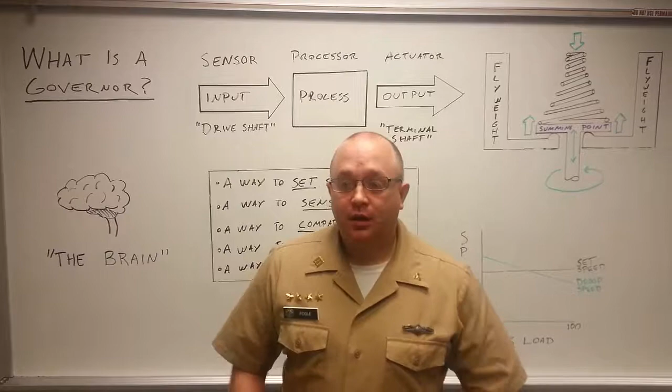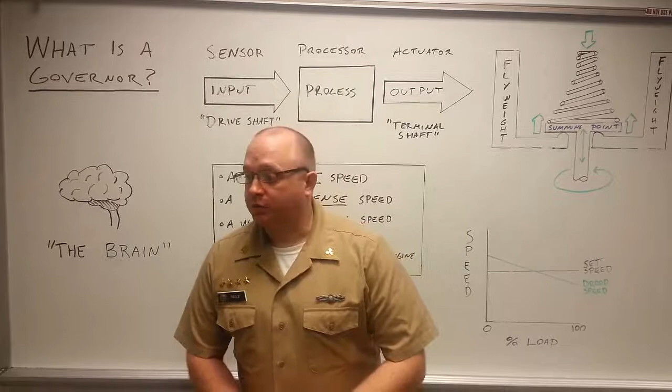Before we get into the design of our test stand, I would like to briefly go over governors and governor operations so that we have a firm foundation to work from. First obvious question is, what is a governor? A governor is a device, mechanical or electrical, that regulates and controls the speed of an engine.

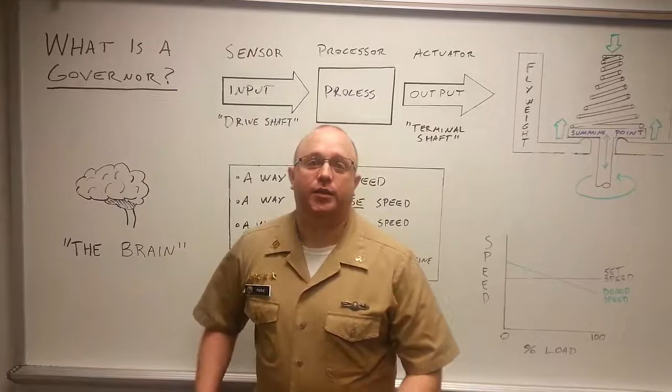You can think of it, and it is also often referred to as the brain of an engine. So governors operate, you can think of it as a simple input, process, output device.

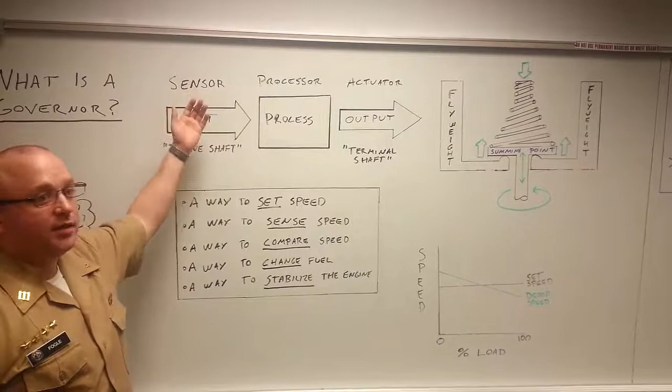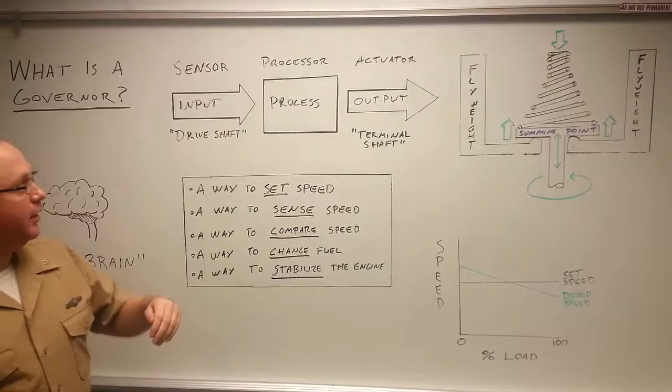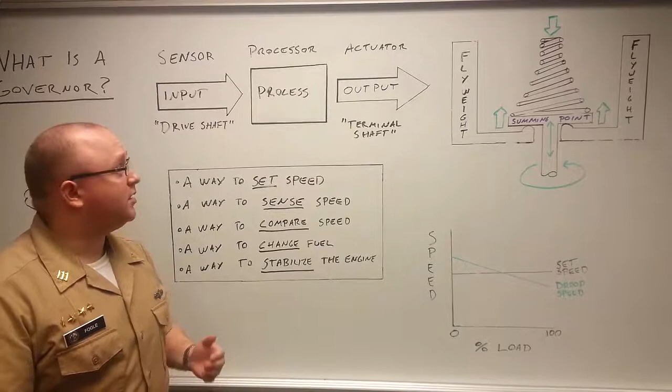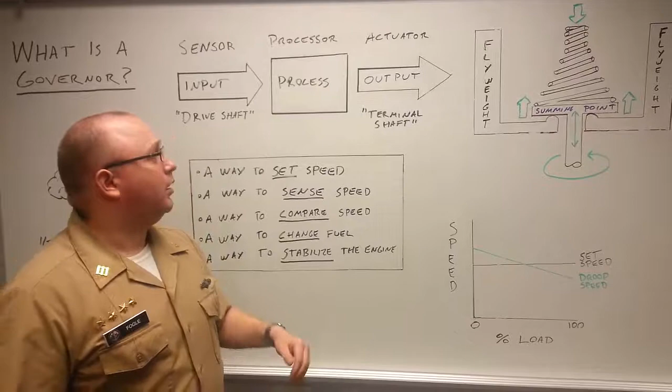Where as our input, we have our sensing element, which is going to directly sense the speed of the engine, usually through a connection through a drive shaft. Then that signal is taken to a processor, which is going to take that signal, compare it to a prior set point, and determine an outcome, which will be delivered through an output, which is an actuator that is controlling some device to physically alter the speed of an engine. Usually it's a terminal shaft driving a fuel rack to change the amount of fuel delivered to the engine.

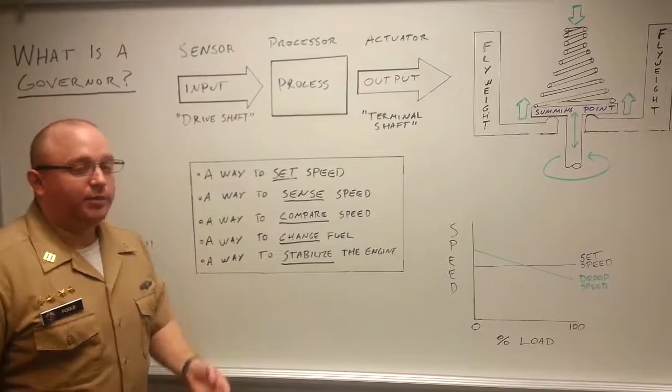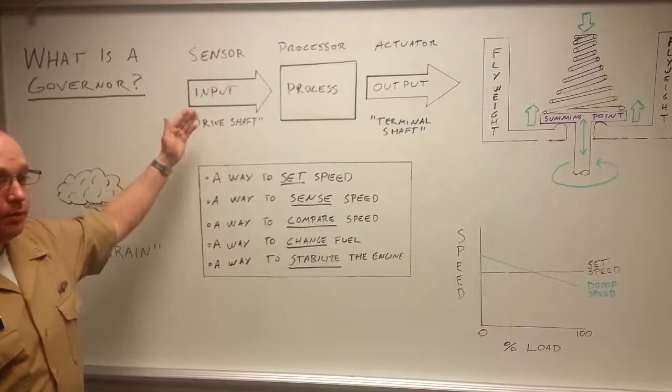So with this, a governor needs to be able to do 5 things. It needs a way to set the speed so we can determine exactly how fast or how slow we want our engine to be running. A way to sense speed, as we said, with our input process, where we get that signal in.

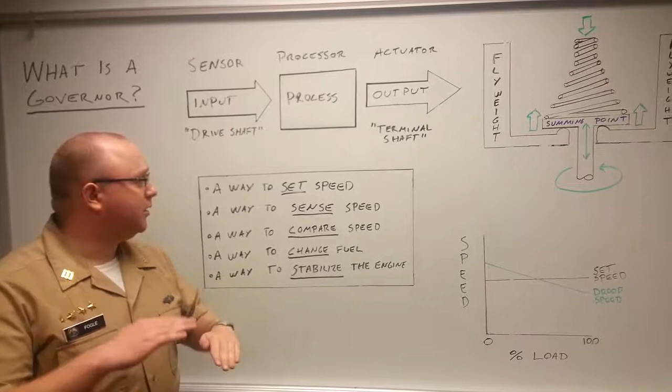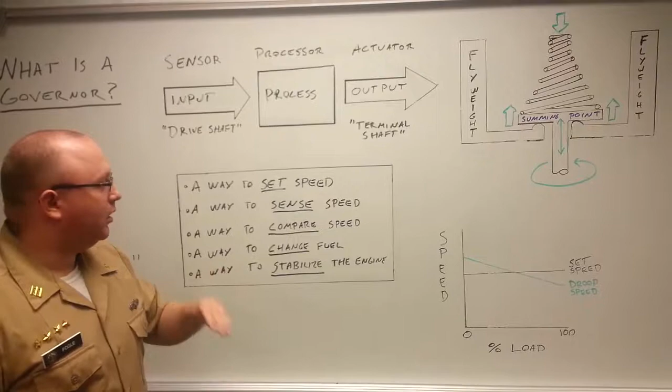Then we need to compare that sensed speed to the set speed to determine if there's a difference. If there is a difference, then the governor is going to act on that differential, and it's going to change the amount of fuel delivered to the engine so that to correct for that change. And finally, it needs a way to stabilize the engine to prevent the engine from constantly correcting itself and getting excessive hunting or surging.

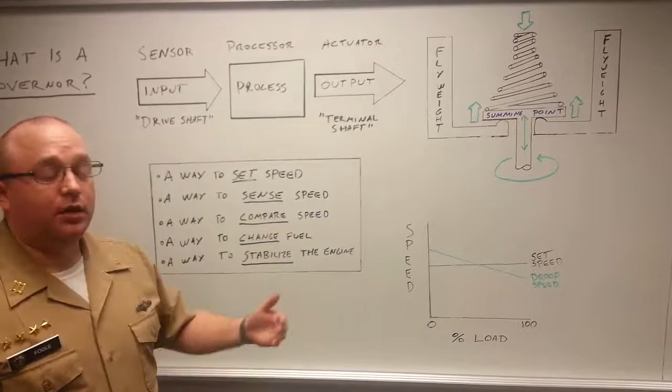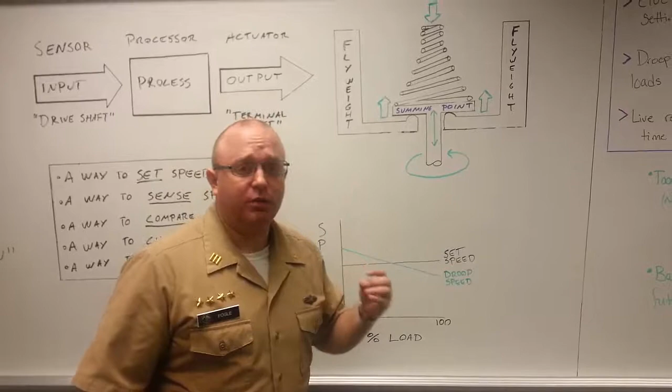So as a basic overview, there's both electrical and mechanical governors, but I'm going to focus on a simple type of mechanical governor, which is known as the flyweight method. In this method, we have our drive shaft connected to a system with flyweights and a spring.

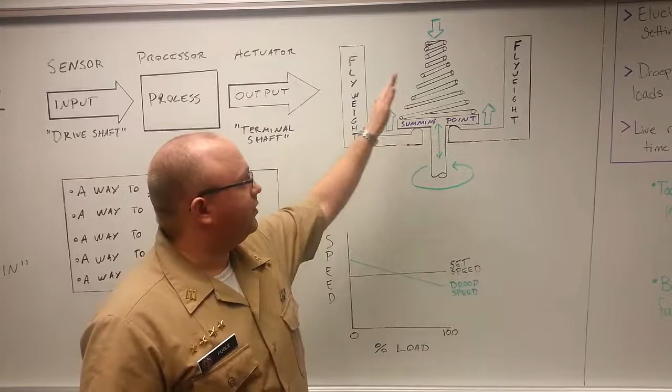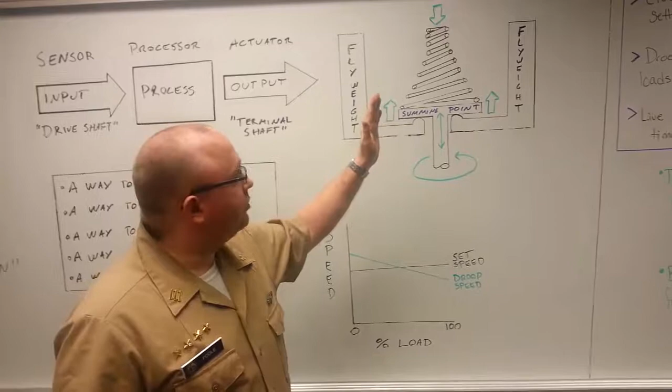As the drive shaft spins, the flyweights swing out and push the summing point up. As the drive shaft goes slower, flyweights come in, summing point goes down due to the spring pressure, and this is controlling a pilot valve that's going to control our terminal shaft actuator position, which controls our fuel.

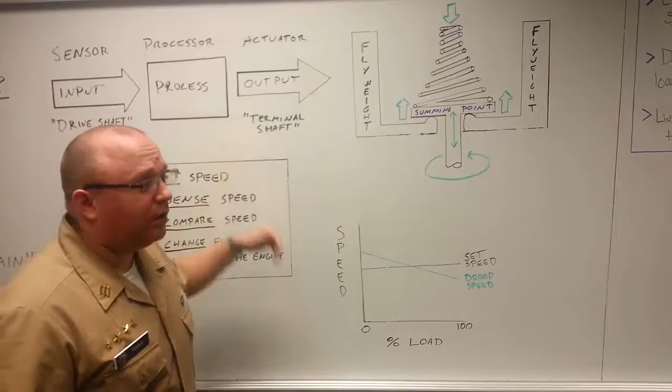Another final important aspect of governors is the concept of speed droop. In this case, speed droop is a percent of change from our set speed that's going to occur as we move from no load to full load. Most governors have an ability to adjust how much droop you have,

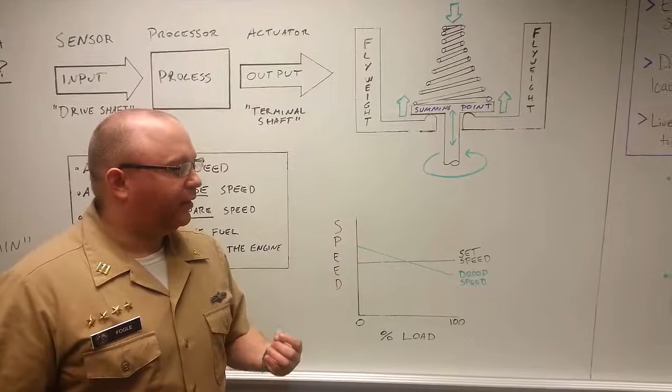but it's important to have this setting properly calibrated. If it's too much droop, the engine is non-responsive. If there's too little, then the engine will have excessive hunting or surging.

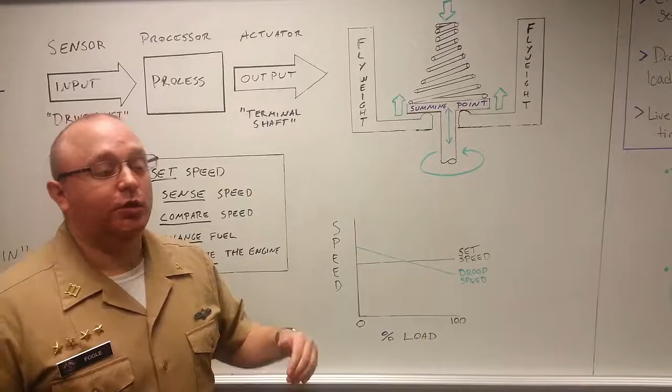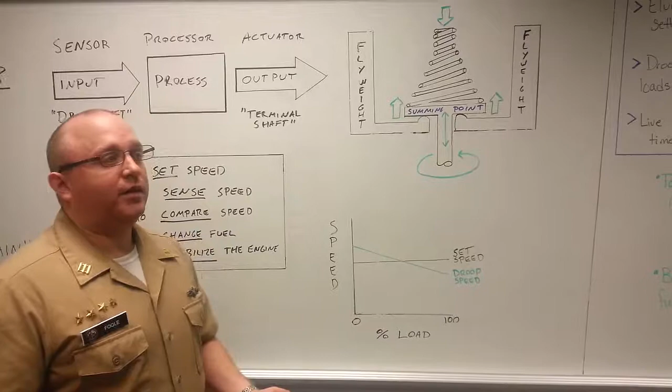So with all these pieces and components, problems can arise with the governors, and that is where we decided to create our governor test stand in order to address and demonstrate some of these issues.

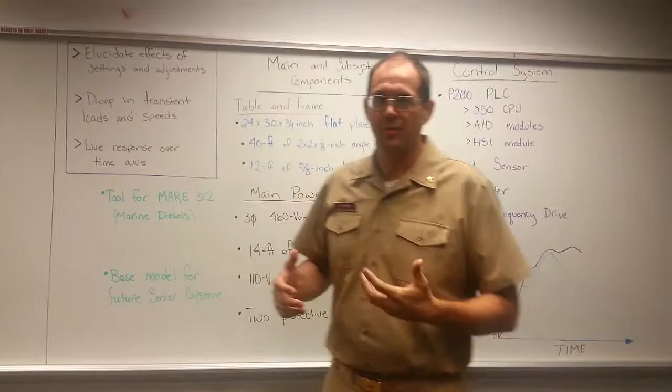As Alex mentioned, there's some aspects that we need to address and demonstrate through the test stand that we fabricated, and mainly I want to cover the highlights of what that test stand does and how it does it. So really, first thing it does, it elucidates the effects of settings and adjustments.

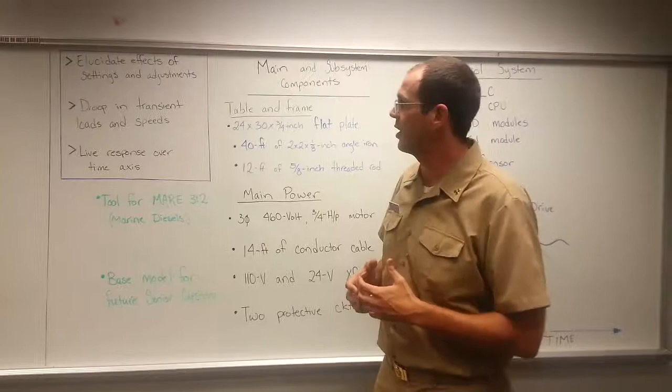On the UG governor itself, which is what we test, it has control knobs on it, and setting those, we wanted to visually demonstrate through a live graph what happens to the governor. It also demonstrates, as Alex mentioned, droop in transient loads and speeds, and it delivers a live response over time axis from 2 inputs, as you'll see later.

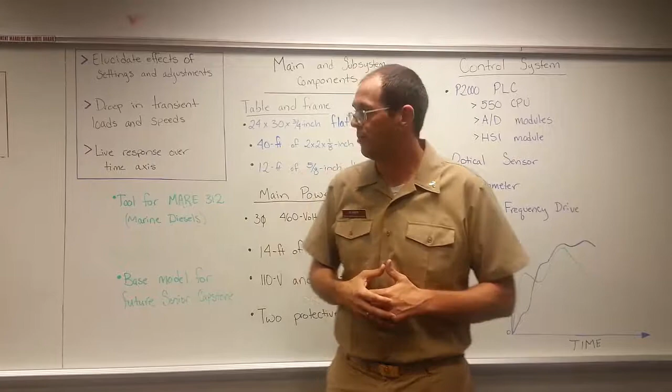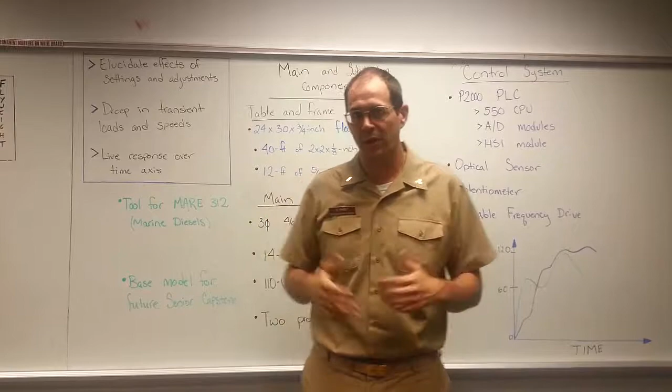We developed a test stand to address two key points for TAMU: one, as a tool for the MARE 312 Marine Diesels course to help illustrate what a governor is and how it works, and as a base model for future senior design capstones so they can expand and include actuators and PGAs.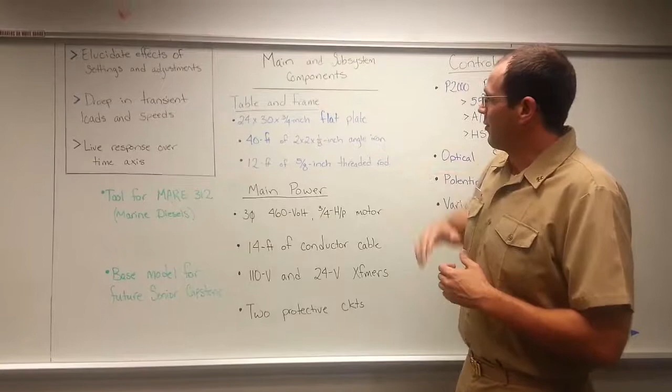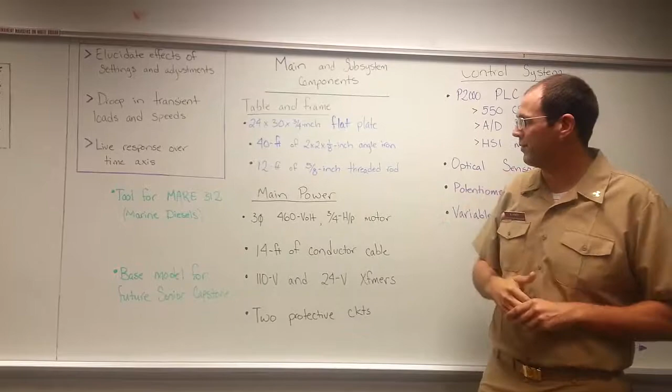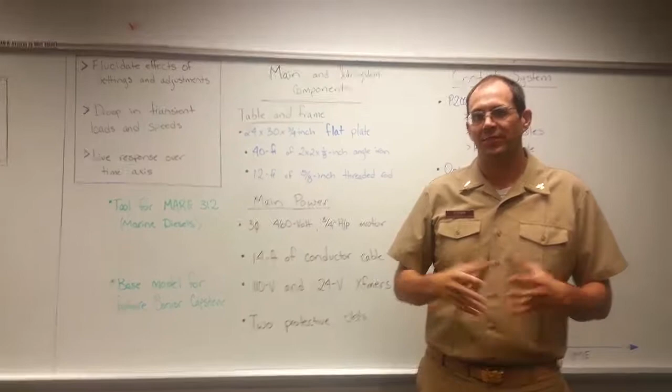It's comprised of several components. The main system components are a table and frame. We used a 24 by 30 3/4 inch flat plate steel, about 40 feet of 2 by 2 1/8 inch angle iron, and about 12 feet of 5/8 inch threaded rod, which we use for threaded fasteners and adjustments to individual feet.

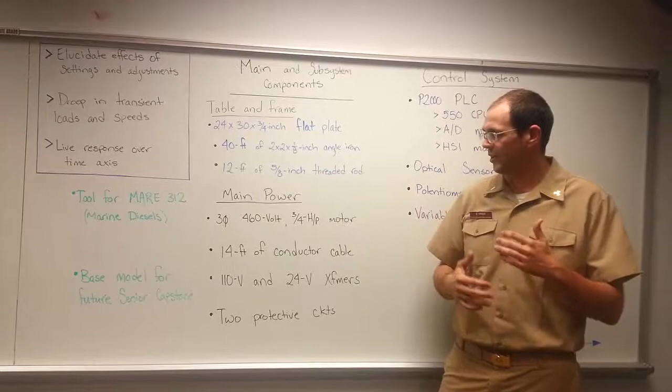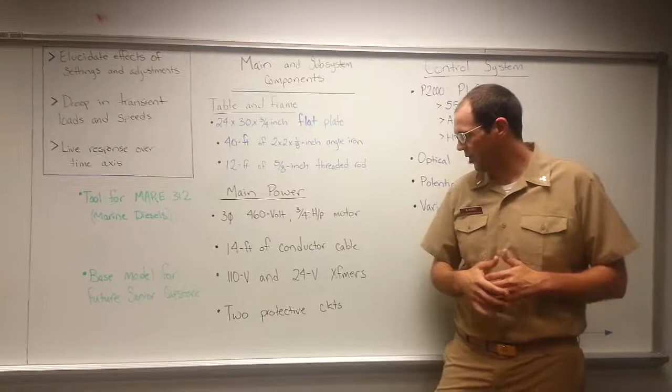The main power is comprised of a 3-phase 460-volt 3/4 horsepower motor spinning at a range of speeds, driven by a VFD, and about 14 feet of conductor cable ran to a 110-volt and subsequently to a 24-volt transformer. It includes 2 protective circuits, so we tied in overload protections on those as well.

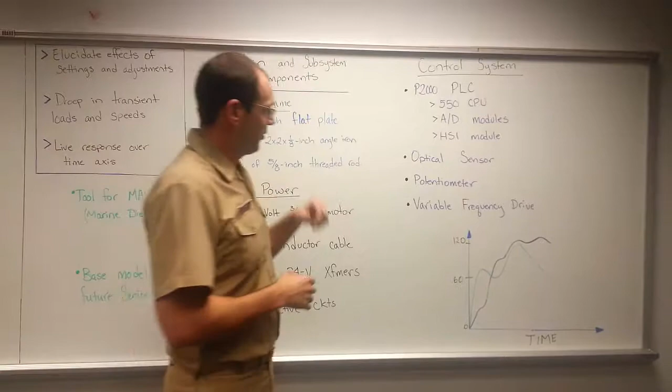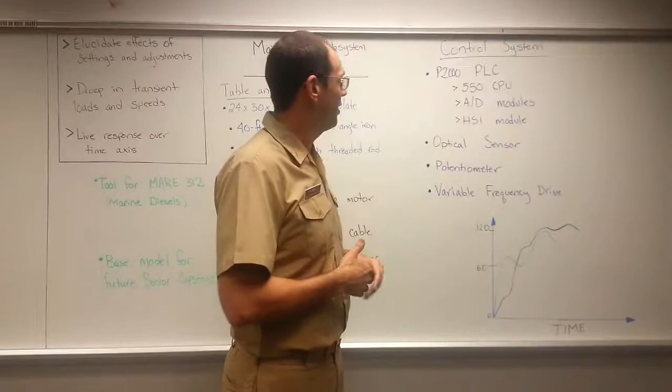The main power then feeds to a control system after the motor and after the transformer, which is comprised of a P2000 PLC made by Automation Direct. We tied in a 550 CPU, an analog digital module, and a high-speed input module, which then feed to the PLC and deliver live feedback responses.

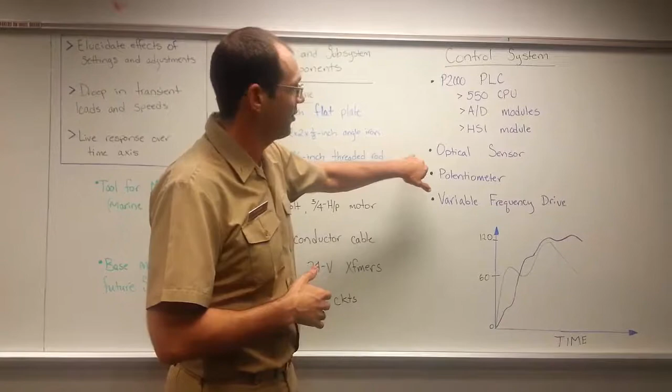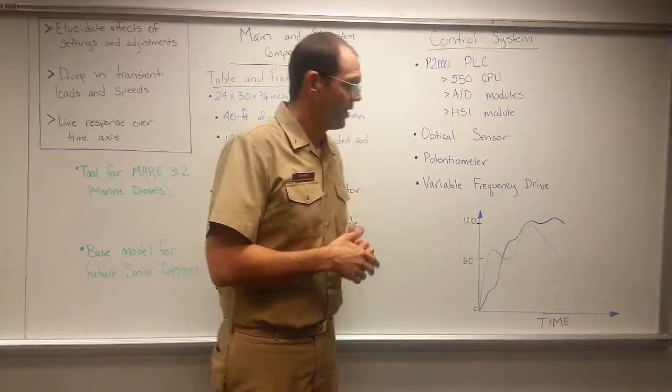Those are sent signals through an optical sensor and a potentiometer, and we again demonstrate the load changes through a variable frequency drive. That's all to simulate the aspects mentioned earlier by Mr. Fogel.

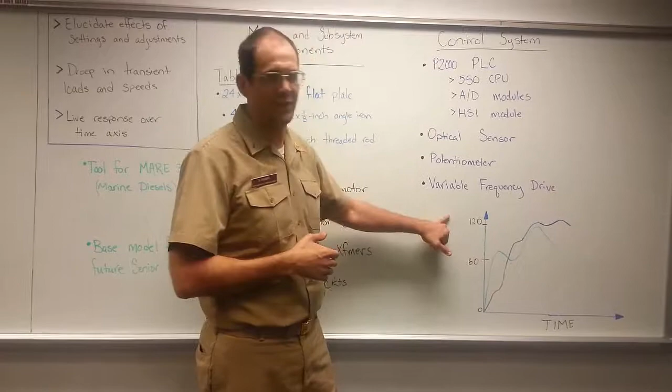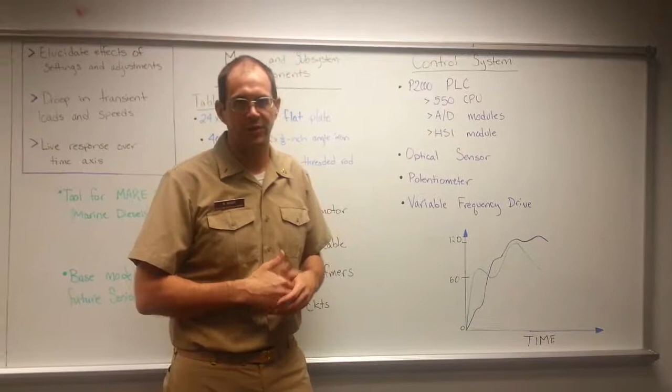Ultimately, we deliver live-time graphs through time over a range of values. We were able to input some of the mathematics into the PLC to range within a pretty close tolerance of each other, so you can see them within one graph at the same time. Thank you.

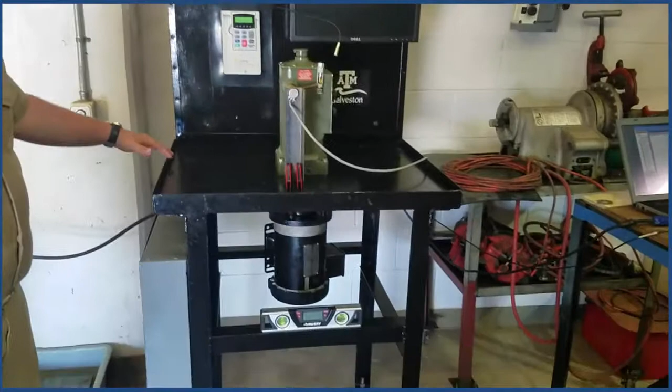Howdy, this is our governor test stand. It's built with approximately 40 feet of angle iron. It has a 24 by 30 inch 3/4 plate, an electronic level so we have a true flat surface, and a 3/4 horsepower, 3-phase 480 motor, which drives our governor.

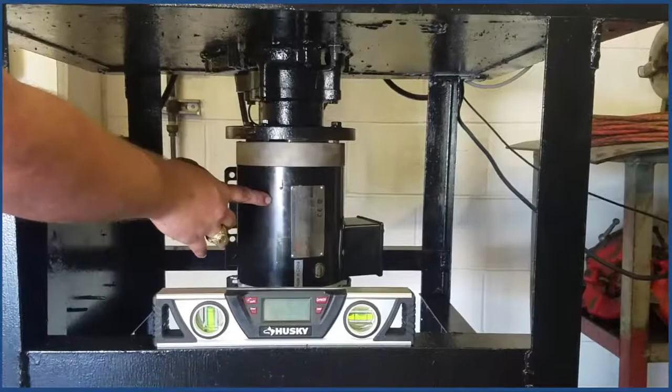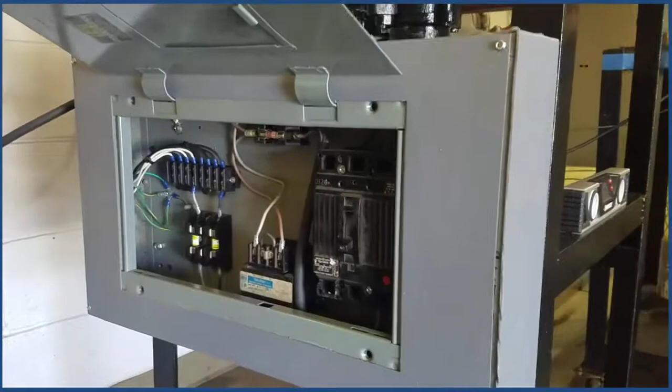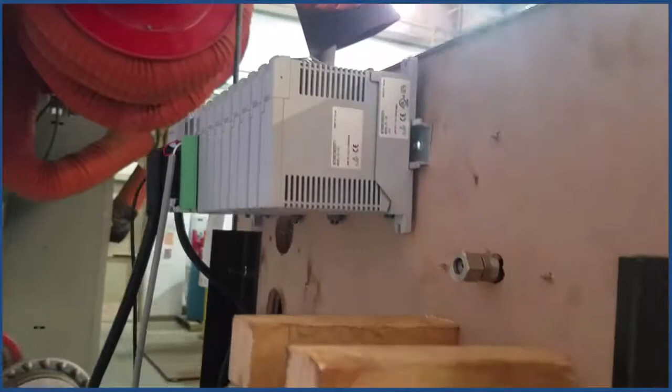Our electrical system is a 480 input, which drives our VFD and our motor. It is then stepped down to 110 voltage to drive our PLC in the back, which has inputs from our optical sensor and our potentiometer, which we use to calculate our displays.

I want to take you guys through the procedure of starting up our governor test stand. First things first, we'll ensure the breaker's off and then plug it into a 480 outlet. Today we're using the one in the machine shop.

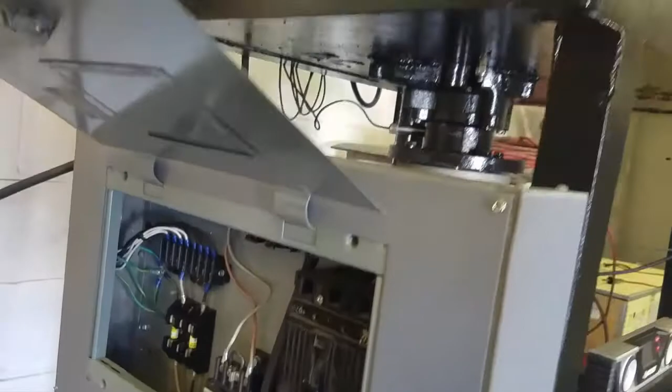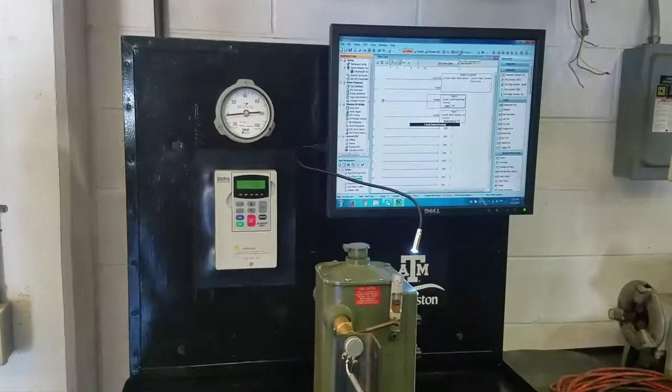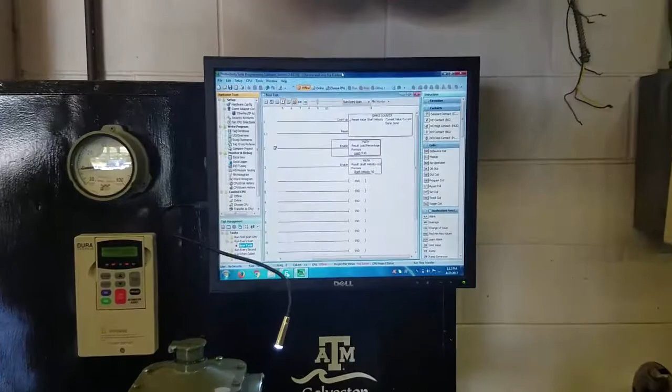After that's done, you will flip the breaker on. We have an indicator light to ensure power to the system, and we'll let it boot up. From here, you can see this is showing our ladder logic for monitoring our speed and our fuel rack position by percentage.

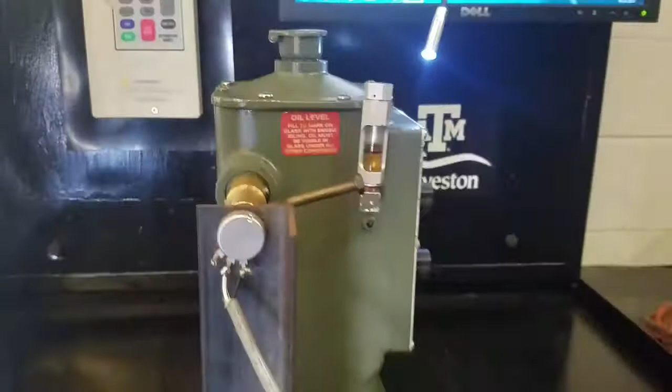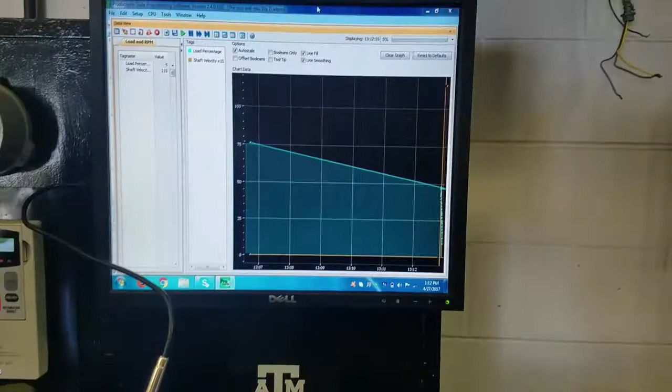From there, you have a run and stop. You will start, press run, that will speed up your motor. And from there, you will click on to data view, and it takes a minute to load up.

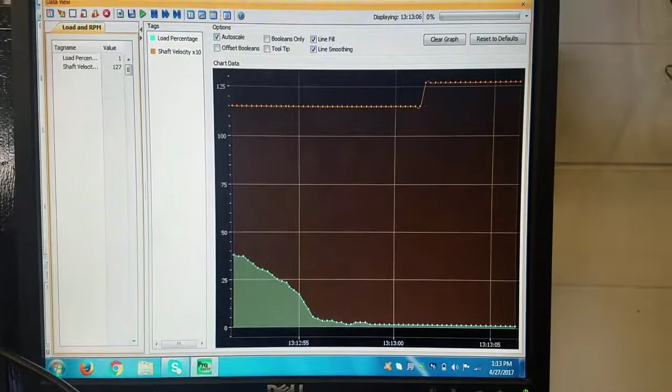Here you can see our RPMs, it's to the 10 or times 10. So right now we're running at 1270 RPMs. From there, you can fluctuate the speed by pressing your up and down arrows to change your frequency. The higher the frequency, the faster the motor will go.

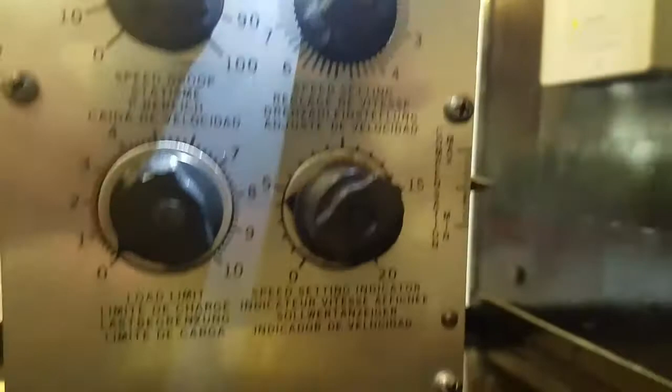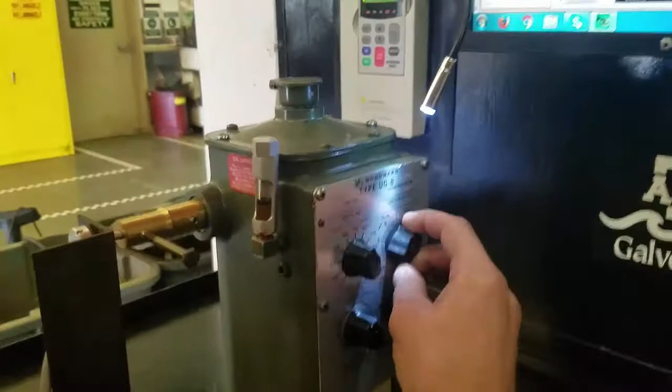From there, you can come over to your indicator dials to change different settings. For training purposes, you can change each setting to show them how the speed and fuel rack position will change, and also for calibrating to put on an engine. You're able to mess with speed settings, droop settings, and different things to get a change in your fuel rack position. As mentioned before, our potentiometer shows the percentage of what the fuel rack is.

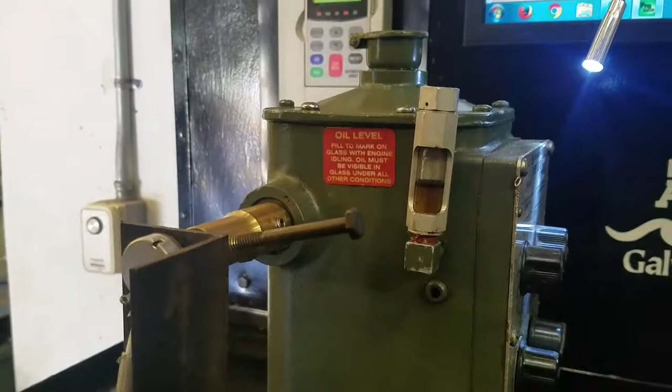As you see, it settles out to about 75%, and with that, you will see that you're getting 75% of what you need fuel-wise.